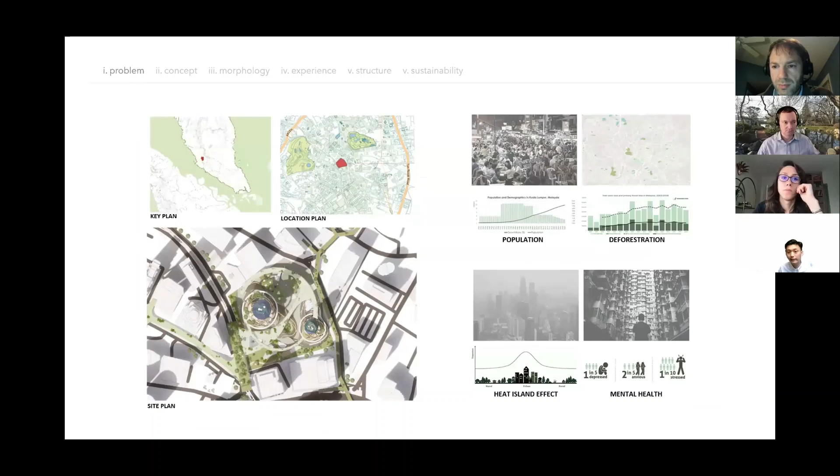According to our research, Kuala Lumpur is one of the top 4 most stressful cities in Southeast Asia. It is because of lacking spaces for relaxing and leisure activities in a natural setting. More and more city dwellers are suffering from mental health issues such as depression and isolation. Therefore, it is proven that humankind cannot survive without nature in the long term.

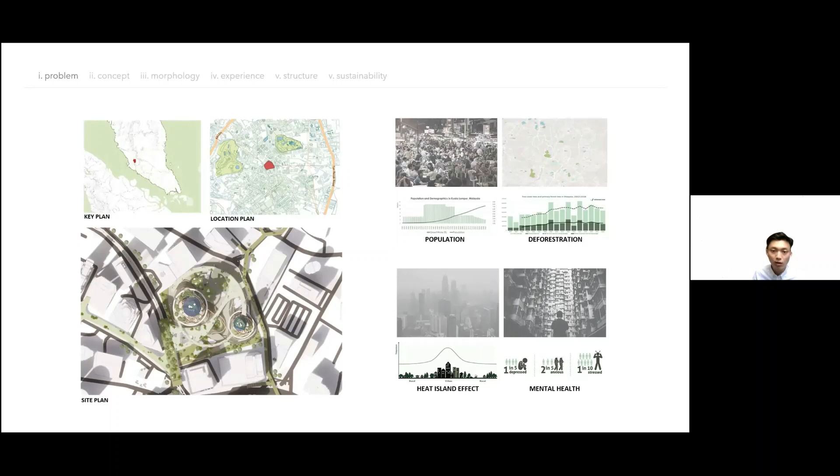Are modern city developments in line with the biological build-up of our bodies and minds? The concept of the Seed is intended to build a home for humankind, flora and fauna, to celebrate the nature which it originally belongs to.

The proposed tower is located at one of the city's most prime zones, surrounded by administration and office towers in the heart of the city center. The farming and ecological park intersects between the towers to form a continuous vertical forest. It will serve as a green catalyst to attract local urban residents and tourists, leading to substantial improvement in the living quality of the place.

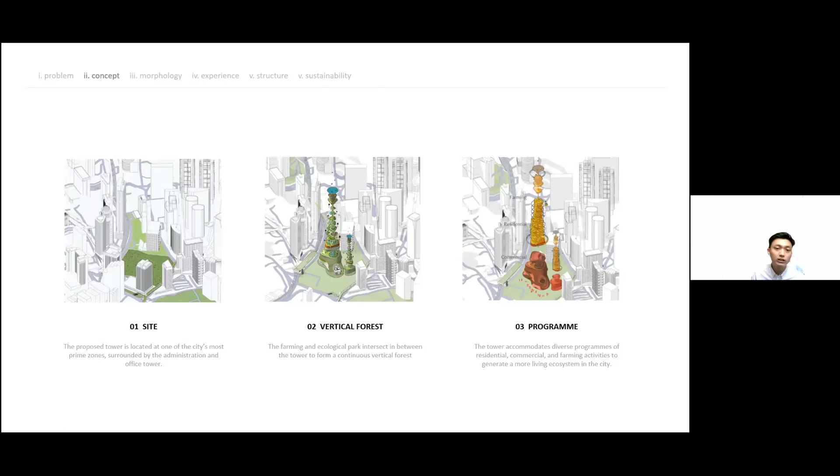The tower accommodates a diverse program of residential, commercial, and farming activities to generate a more economical, sustainable, and living ecosystem in the city. The Seed can plug into different cities around the world with adjustable size, scale, and proportions to respond to the site context respectively.

Below the tower, the urban linkage is proposed to enhance biodiversity and is activated by a walkable walkway connecting people in different directions. Lastly, the modular living pods allow users to work, stay, and experience the Seed, as well as have a short break and get out of the hustle and bustle of the city.

The containers are flexible and adaptable, which can be plugged in or out according to people's needs.

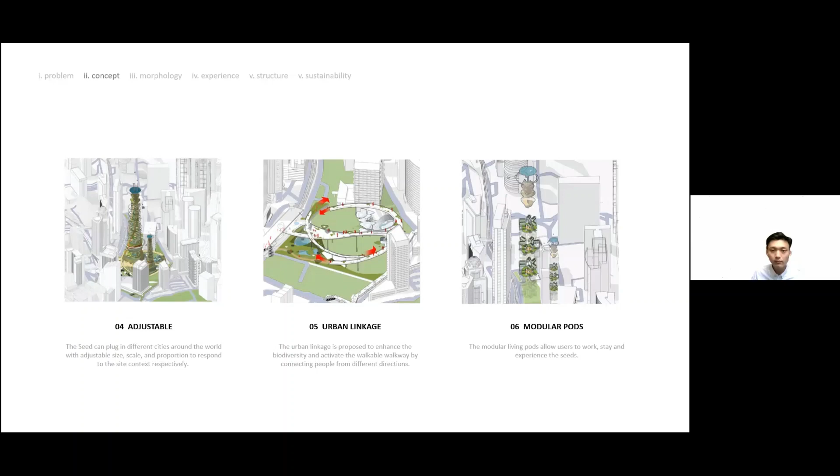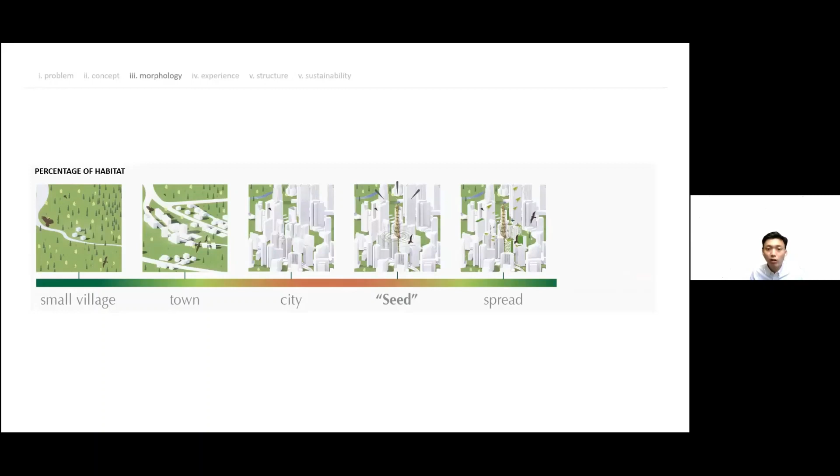Before civilization, humankind coexisted with nature fine. Right now, our selfishness is fragmenting the forest because of rapid development. Gradually, the imbalance of abiotic factors is the key to the global warming effect.

As the Seeds turn green, they help enhance biodiversity for a balanced and harmonious coexistence between humankind and nature. The Seeds accommodate diverse programs of residential, commercial, and farming activities to form vertical cities.

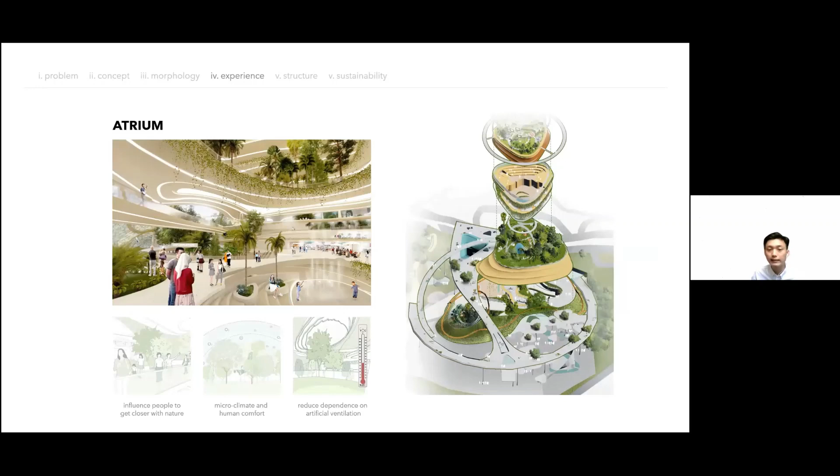At the atrium, a mall with a tropical rainforest garden is designed to invite people to get closer with nature and create a microclimate inside the tower to reduce dependence on artificial ventilation.

Above the atrium, there is a rainforest recreational sky park. This sky park is created to provide urban wildlife a place to settle down, and a space for urban people to rest and relax.

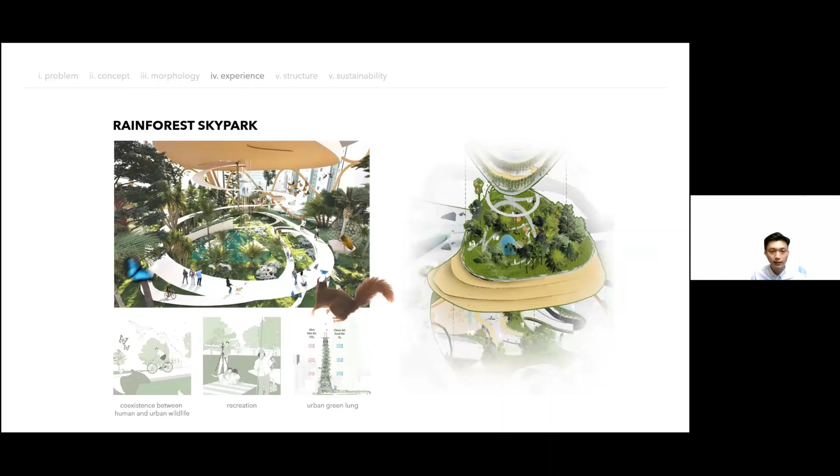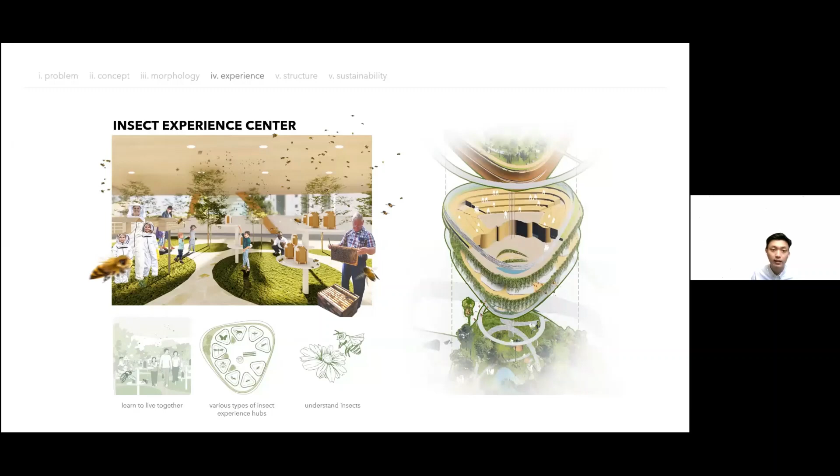The Insect Experience Center is designed to increase people's understanding of the benefits of insects such as bees and butterflies. The target is to influence people to appreciate, love, and learn to live together with insects. A Research and Development Center is set up to research the use of insects and how it can improve our ecosystem, economy, and waste management through pollination in urban areas.

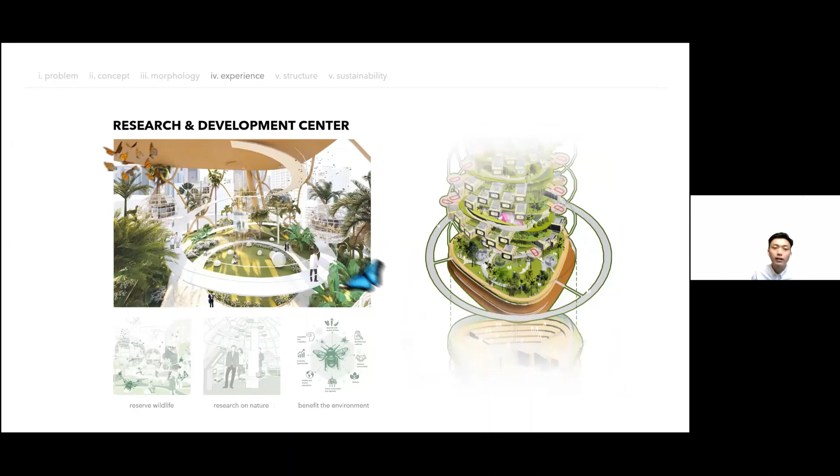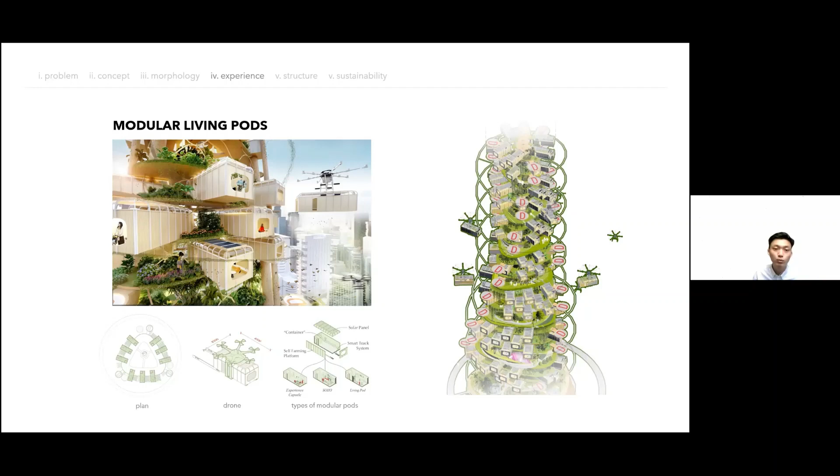The Seeds consist of 3 modular containers - experience capsules, SOHO, and living pods - for different user experiences. Each module is self-sustainable, with solar panels and its own farming pockets to empower consumers to take charge of their daily usage.

In today's construction, technologies have shown that twisting towers are beyond aesthetic purpose. This type of design can make a building more aerodynamic and energy efficient, and these features have apparently reduced structural construction materials.

The seed is designed in a twisted tree-like structure, which is inherently efficient as the form tapers in response to increased wind loads. The wrapping vein-like, glue laminated timber structures extend to the top, forming a porous facade that acts as a filter for urban pollutants in the city.

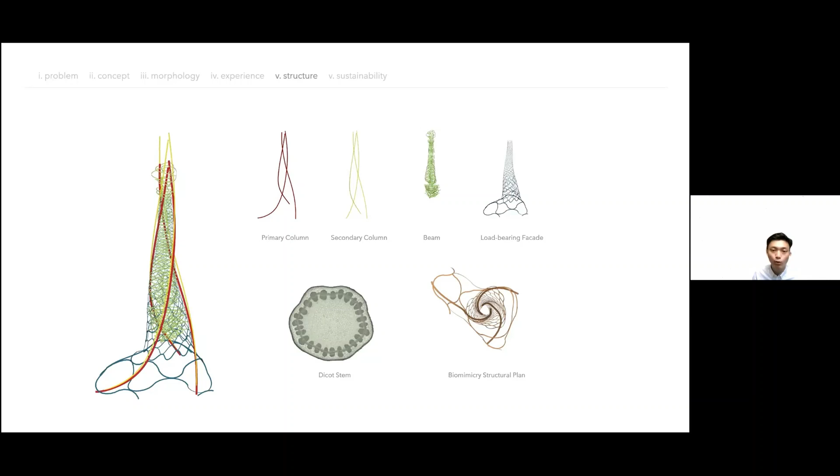The towers serve as a green lung, wrapped by hanging plants to help refresh air particles from the urban area. The tower collects rainwater from the top for farming purposes, supported by a mist system to sprinkle seeds for agriculture and eco-farming around the tower.

The towers receive sunlight on modular containers, offsetting the energy consumed for light and sound. The waste is valued in biodegradable waste systems for energy generation, as a renewable form of energy to supply back to the buildings.

Overall, the farming, green belt, and landscaping around the tower allow insects to move in different ways, enhancing biodiversity connections and the defragmentation of greens. All these solutions overcome the still essentially anthropocentric and technical concept of sustainability, while moving in the direction of new biological diversity for future generations.

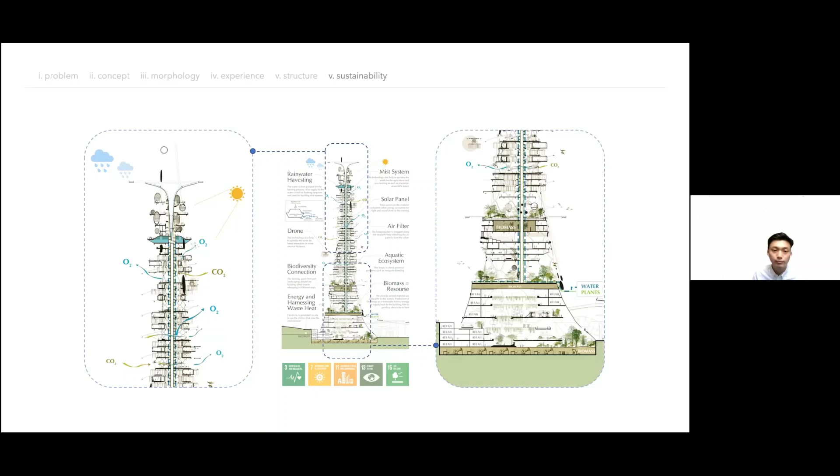Overall, the building with natural settings engages human feelings and visual connectivity, as well as emotional impact, achieving a high degree of harmony between human and nature, bringing mentally suffering urbanites a psychological relaxation.

Green a city starts from planting a good seed. The seed is a prototype building designed for promoting biodiversity, which not only caters to humans' needs but also emphasizes the relationship between humans and other living species on earth, enhancing biodiversity and creating a green, happy, and healthy living environment in cities for humans, flora, and fauna around the world.

Let us look forward to creating a whole new world in the future. Thank you.

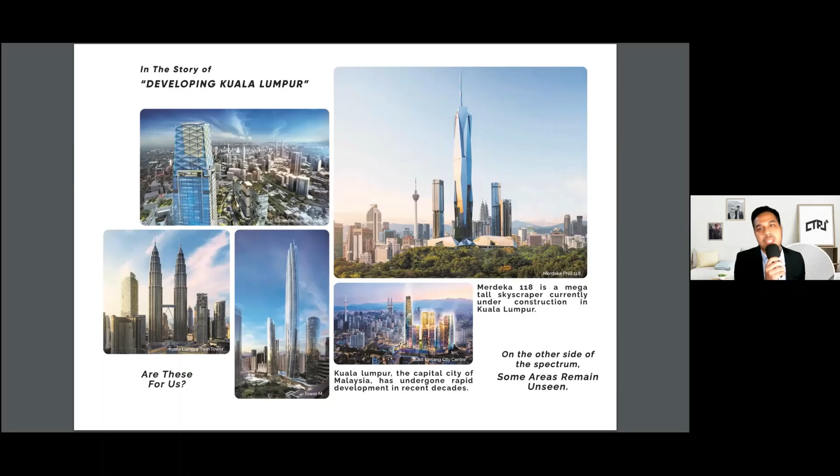One of the unseen sides of Kuala Lumpur is Pudu. It was once an economic gem of Kuala Lumpur, known for its market goods such as vegetables and chickens. However, currently Pudu is seen as the dark spot of Kuala Lumpur; rapid development of surrounding areas left Pudu with several critical issues that shouldn't be happening in a well-developed country. Due to this underdevelopment, it leads to issues of poor waste management, a migrant-dominated economy, and a dirty market. So from a market haven, Pudu has turned into an unfriendly and unhealthy market.

So, unresolved issues in Pudu. The presence of a large wet market in Pudu leads to the first critical issue: improper waste management. This leads to a dirty and unhealthy marketplace that makes local customers uncomfortable exploring it.

More than 100 bins of bio-waste are generated daily by 1,800 market stalls in Pudu. The question is, the waste is produced every day, but where does it go? The community within Pudu is to be blamed, as the waste is not properly managed. However, a solution can be devised to benefit the community and address the rising rate of unemployed youth.

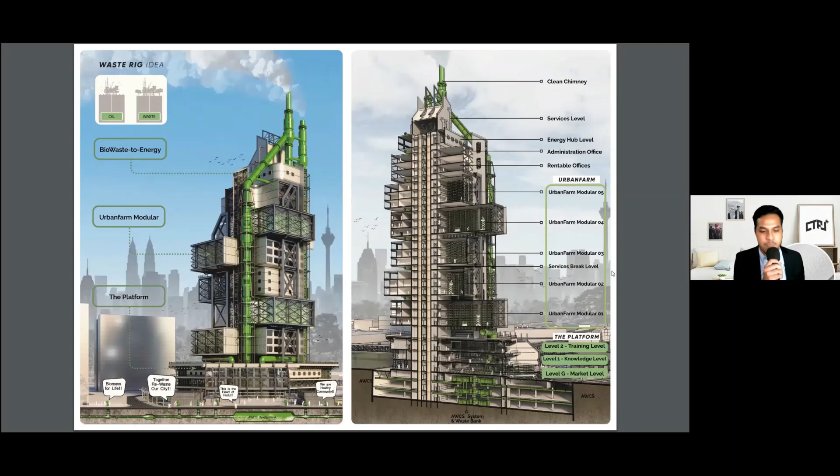So the big pipe is the Eternal Engine, the main component of the building. It's a mechanical system that can collect waste from the building itself and from the entire neighborhood to generate waste into energy and fertilizer.

As we can see in the diagram, the horizontal biomass process shows the sequences of a conventional biomass system, while the right diagram shows the innovation of these sequences into a vertical manner. The waste collection system is divided into several methods: from the building itself, from the neighborhood, and from the nearest market.

Additionally, these features use pneumatic conveyor technology, using pressure to transport waste, which can reduce environmental impact.

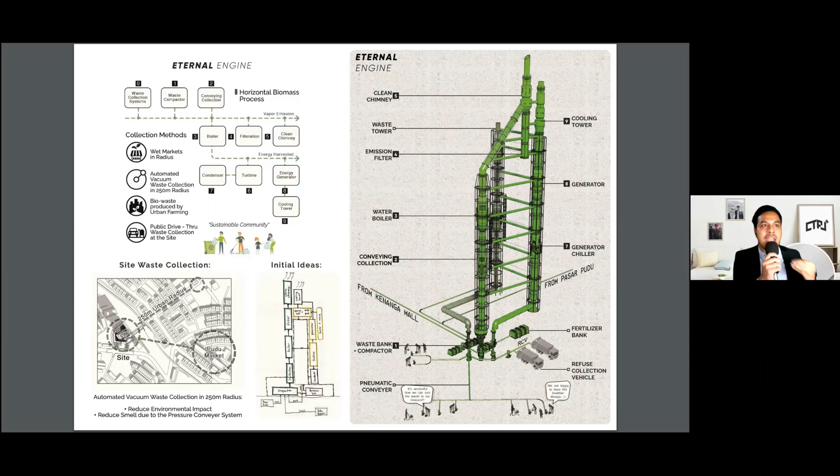The second component of the building is the urban farm modular, a triple volume stacked farm connected to a sandwich of office, R&D spaces, and operation spaces. This modular is integrated together with the Eternal Engine system to achieve zero waste farming.

These sketches illustrate my initial ideas, highlighting the integration of spaces at different levels to form the urban farm modules.

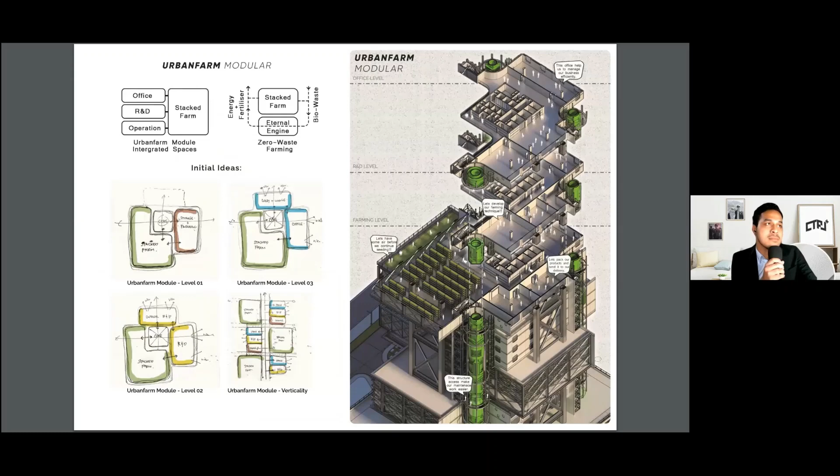So why high-rise? With the Eternal Engine system, instead of having farms in different locations, we can have a group of farms stacked together, which reduces land usage, reduces environmental impact, enables efficient operation, and allows close proximity for maintenance.

This is the perspective from the urban market, located at the podium. I want to highlight the Eternal Engine penetrating the urban market, symbolizing the capability of the biomass system to circulate the economy in Pudu.

The second highlight is the direct chuted stall, where the hawker can directly toss their waste from their product into the waste bank.

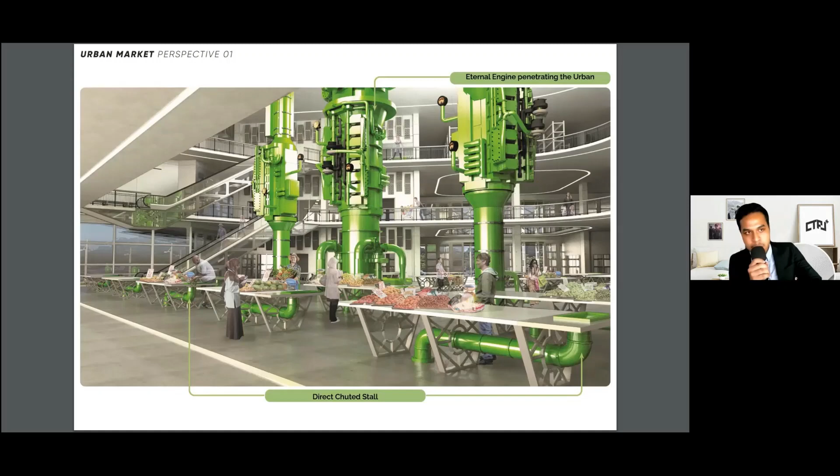So the second perspective of the urban market highlights the usage of coal material as paneling to absorb odor and freshen the air of the market. We can see the goods are fresh because they come from the urban farming itself.

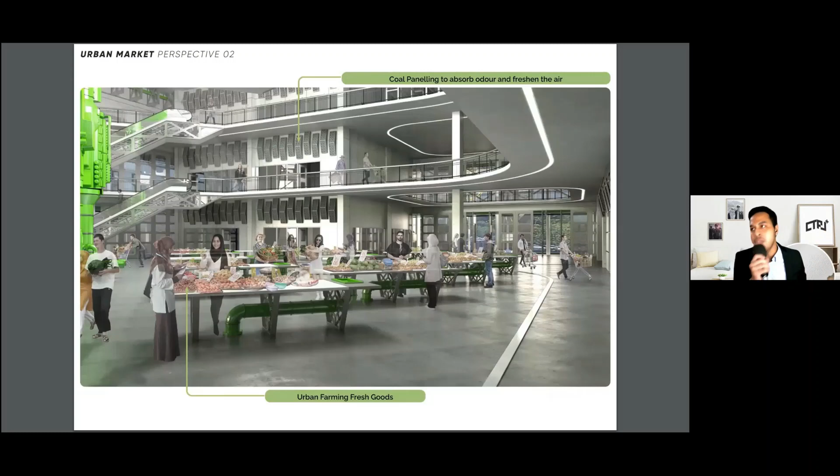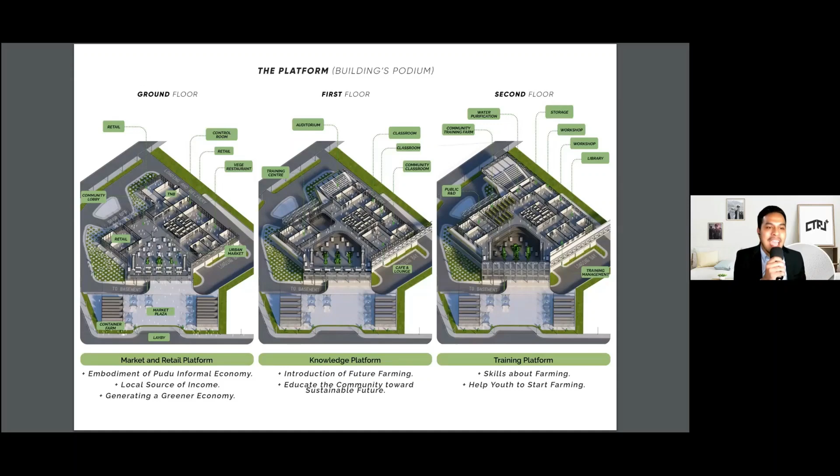So the last component of the design is the platform, which is the building's podium. It consists of a market and retail platform, embodiment of Pudu's informal economy and generating a green economy. The second is the knowledge platform to educate the community toward a sustainable future. And the last is the training platform to help youth start farming.

Finally, Pudu is pioneering other buildings toward zero waste living with several value innovations such as effective refuse, energy generator, sustainable design solutions, farming as a potential economy, recycling urban waste, and others.

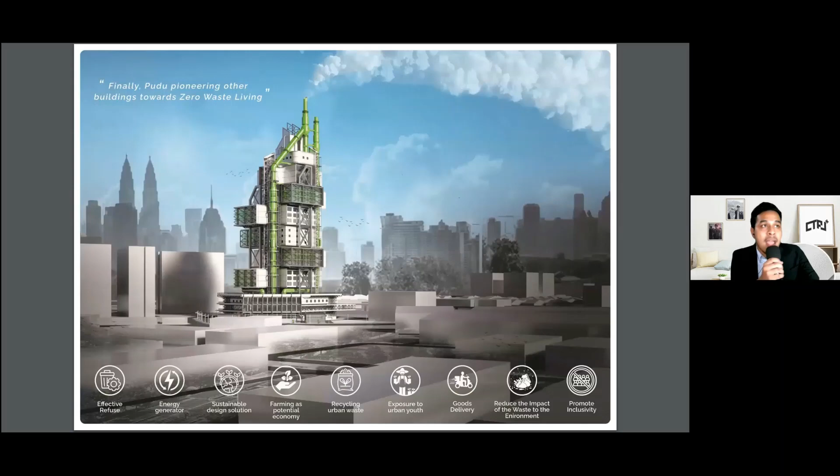And I want to end my slide with a narrative: the amount of avoidable food waste generated by Malaysians in 18 days is equivalent to our Petronas Twin Towers filled to the brim.

But with the idea of waste rig, we can recycle and convert the waste to energy. If we can maximize the idea, we can reduce waste to the lowest level, and finally Kuala Lumpur can achieve zero waste living.

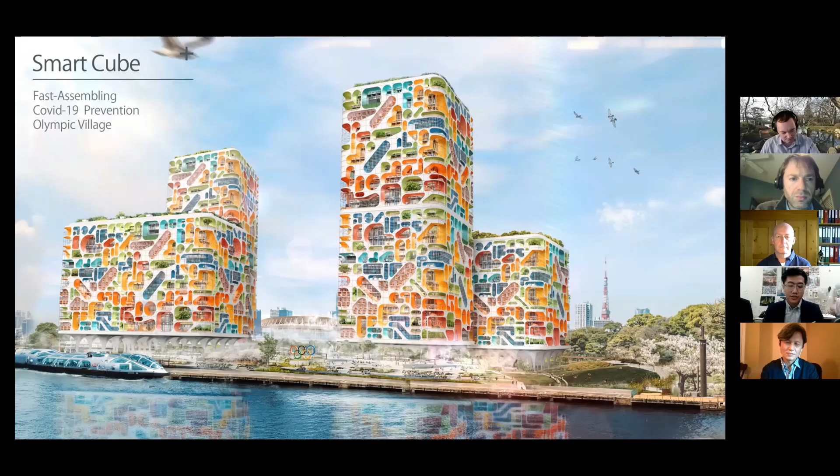Our life has changed a lot because of COVID-19. It is getting worse and worse, with the number of infected people reaching 200 million, making a lot of difference in our life. So we considered the relationship between architecture and a life model 3D design. At the time the project was in the creative stage, there was also a sporting event held every 4 years affected by the impact of coronavirus.

The first stage is preparing for the competition. This stage has the risk of taking local virus out of the country. The second stage is flying to Japan, which can cause infection problems on the airplane.

The third stage is arriving in Japan to gather for training or competition—there's also a risk of infection between players at this stage. Stage 4: athletes are weaker after training and more susceptible to the virus. These processes carry a high risk of infection, so keeping the Olympics safe—particularly the high risk of infection in stage 3 from training or competition—gave us the motivation to do this project.

In order to achieve our concept, we added 2 elements to our architecture: technology and fast assembling. First, technology—we use 4 technologies: AR, navigation, big data, and internet to make different changes in our life. Next, I will introduce the new life model in detail. First of all, reservation and planning are made using an exclusive app on the mobile phone, including meals, training, and so on.

In addition, training menu and diet management, which can be discussed with the coach, can be managed digitally. The app will use big data, analyzing every moving path and using time differences to avoid the possibility of crowd gathering.

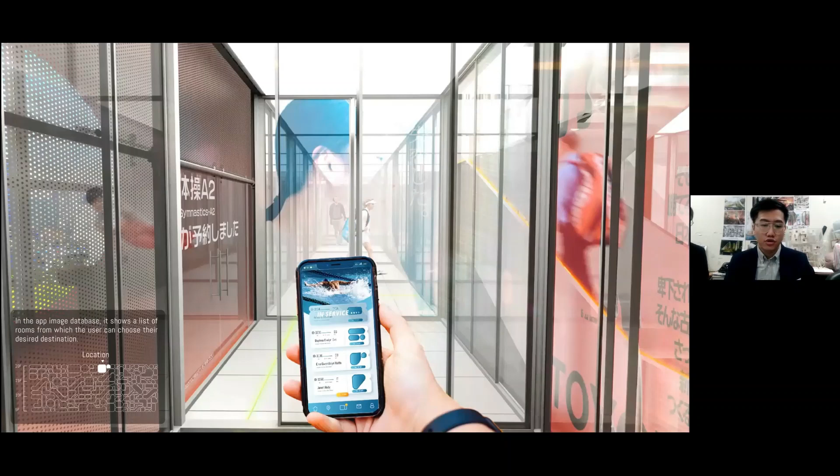This picture shows athletes using their mobile phone to go out to train. You can see from the picture that the phone shows the exclusive path to the destination space, and in the circulation area the display is also used to guide the athlete more easily and clearly.

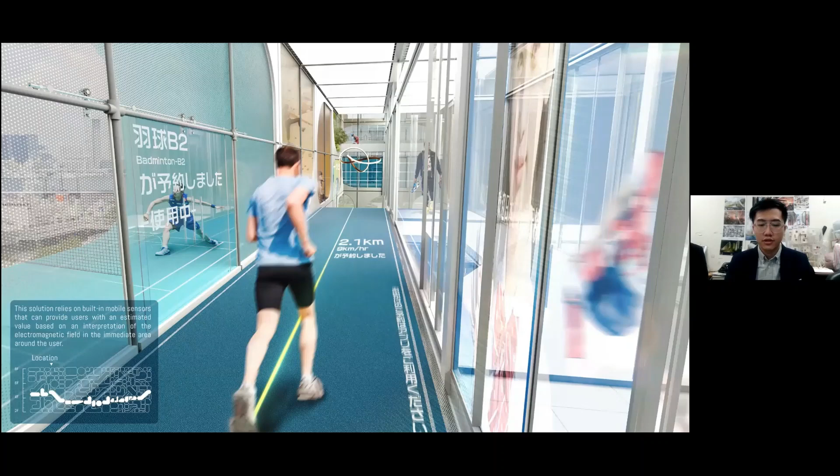In addition to single function individual training space, there is also a semi-public training track. Projection will be used to give athletes a clear diagram of runway paths and to display some training data together. It can make training more efficient and allow players to know more about their training status.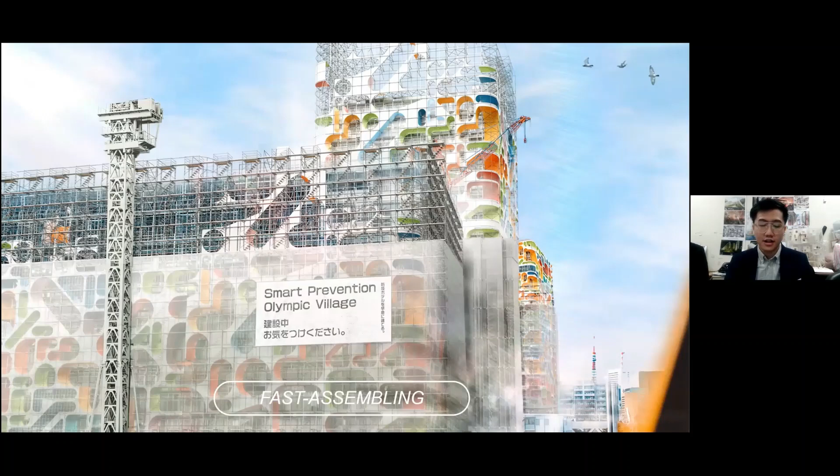The following diagram shows the flow chart of the fast assembling for this program. The first step is to fabricate various modules. Step 2, transport the complete module to the site. Step 3, get to the site and deliver it to the crew. Step 4, unpack and categorize various modules.

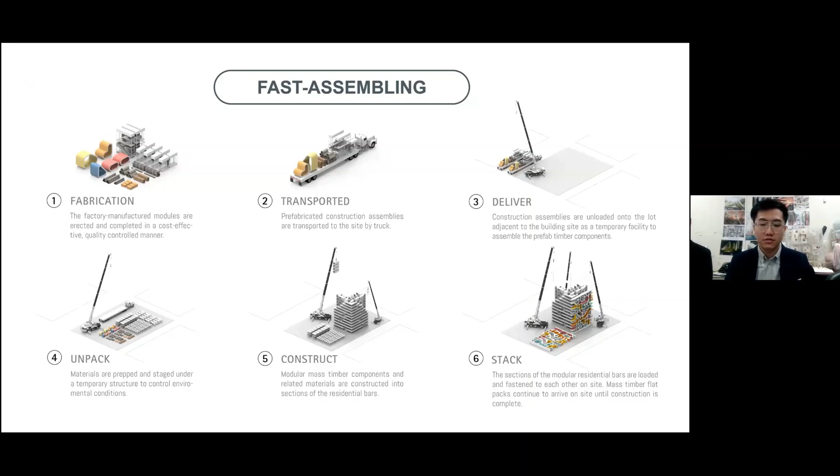Detailed design: there are 3 spaces connected from the inside to outside. The inner layer acts as the living units. All use a single-person suite, which can effectively achieve the effect of epidemic prevention.

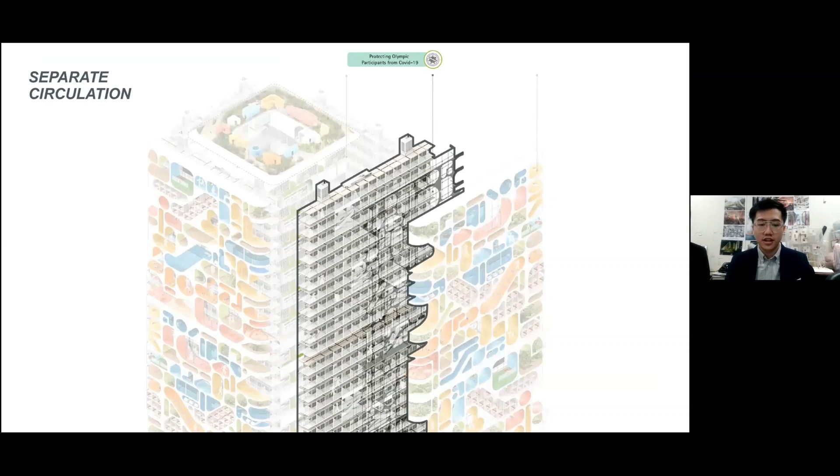The median layer is the epidemic prevention circulation space, which designs all the traffic flow, including stairs, elevators, and so on, in a modular manner. By combining technology with automatic doors, controlling their opening and closing results in a single exclusive traffic flow.

The outer layer is the training and activity space, including the training room, basketball court, swimming pool, and other different training categories of modules. It also includes an air park so that occupants can try to relax at the enclosed hotel.

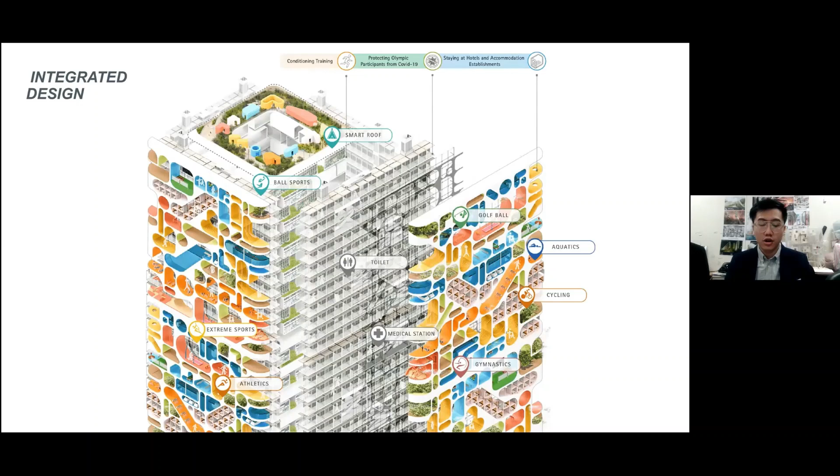Then how can players get to everywhere in the building? First of all, players will use their phone to make appointments and arrangements, starting from the resident unit, then pass through the median layer, the epidemic prevention circulation space.

This layer uses big data analyzing and AR to guide the path to achieve the effect of epidemic prevention. Finally, the third layer of training and activity space—players need to arrive at their scheduled space within a specific time.

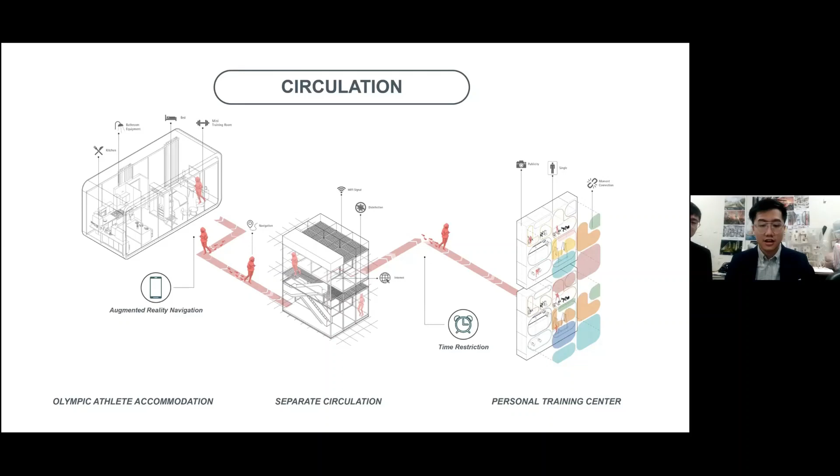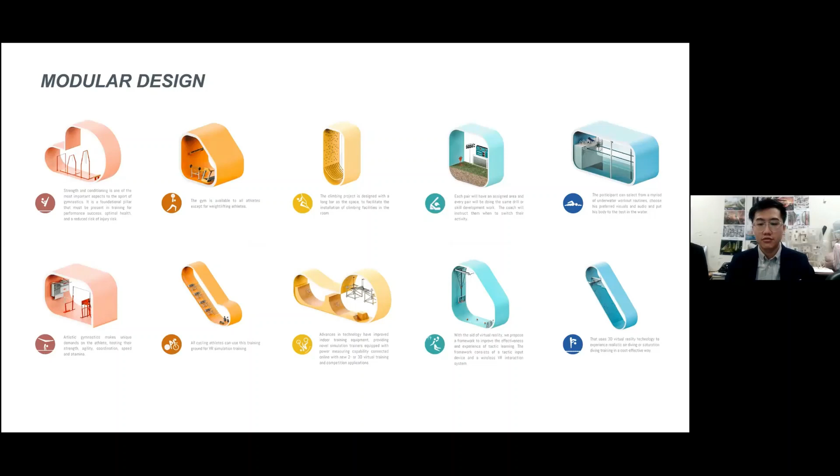Function module: we design training modules for swimming, basketball, training, rock climbing, horizontal bar, and more. We use balance, proportion, rhythm, and so on, mentioned in the principle of design, and consider the formation of the elevation of the building by the division of circulation and sport categories.

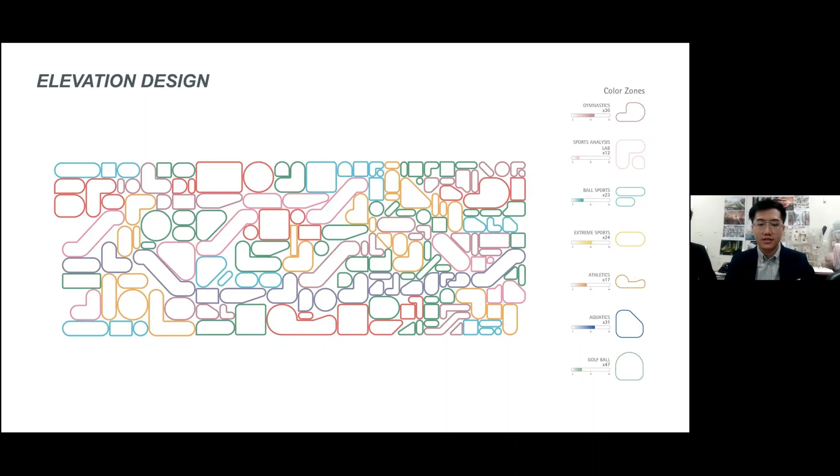We want to design an Olympic athlete village in response to the post-epidemic era of sport events, and we hope to propose an innovative way to solve the difficulty or crisis common to the world. Thank you for listening.

And thank you for presenting. Definitely tackling a lot of very immediate and prescient issues here with all of these projects. It's nice to see, if a little daunting, looking at all the problems that we are facing.

Jurors, questions? I have a question. Thank you, it was a good presentation. I believe you have a good approach to user experience in terms of technology and architecture, and I like the idea that you have used the modular construction approach. But my main question for your project was: what happens after the Olympics? Do you have an idea? Because we have the Olympics every 4 years, and always in a different country. Do you have an approach?

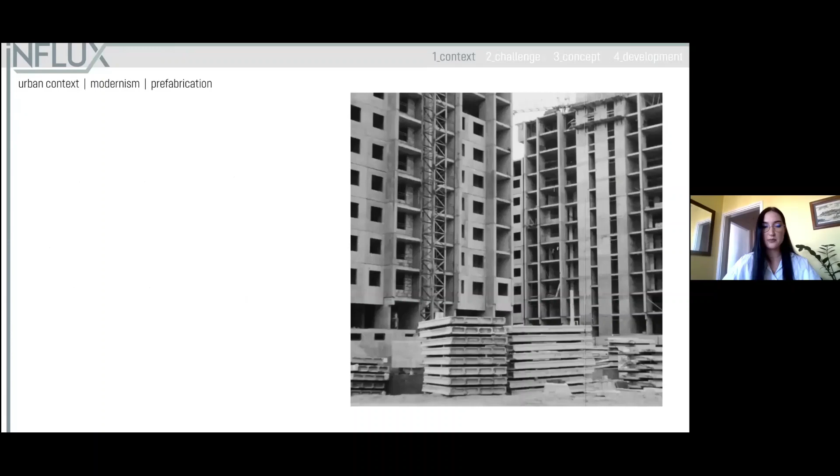The design is located in Belgrade, Serbia's capital, in the municipality of New Belgrade, in Block 17, near the Danube-Sava confluence. New Belgrade represents an authentic urban and architectural whole, designed and constructed using modernist concepts and strategies. It was once one of the largest construction sites in the world, and the largest construction area in the former Yugoslavia in terms of size, space, and number of apartments, buildings, and apartment blocks.

Initially, pavilions were built with the enthusiasm of young people at work actions, but that type of construction stopped very quickly. In the 1960s and 1970s, Yugoslav experts caught up with the most prestigious planetary builders and created a new part of the city according to the highest urban and architectural standards. This experimental settlement was constructed using innovative technology, a prefabricated structural system with installation of pre-stressed concrete elements, called IMS.

The Influx design focuses on the brain drain phenomenon: substantial migration of able-bodied, highly educated, talented, and creative young individuals searching for better pay or jobs under better conditions, causing Serbia to lose qualified people. During the crisis of the 1990s, Serbia lost a significant part of its best potential workforce. 5% of the total population emigrated, of which 91% were people less than 40 years old.

Even after 2000, the situation with migration did not improve, and every 8th highly skilled individual leaves Serbia. The adverse effect of human capital flight caused concern about the nation's development, and emergent situations such as the global pandemic of COVID-19 spotlight the lack of qualified human resources, giving it a new perspective.

Our design proposal, Influx High Rise, is a co-living space for young professionals, and part of a program to curb the outflow by encouraging skilled technicians and scientists to remain in Serbia, or motivate young educated people trained abroad to return or become transnational in terms of brain circulation.

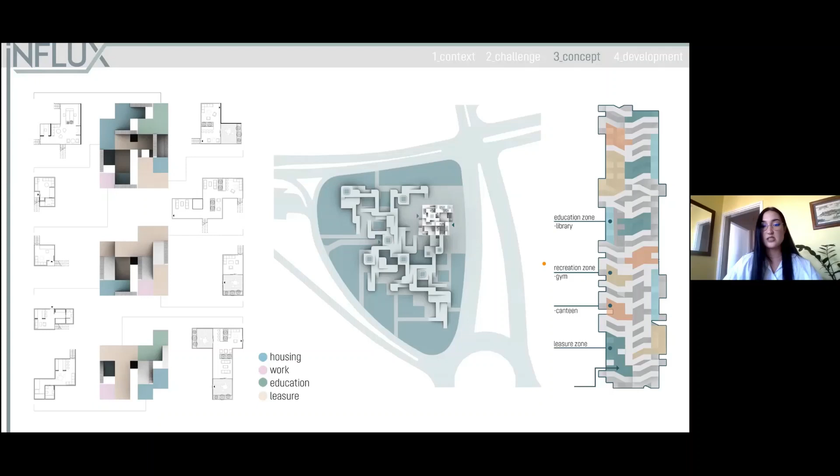The goal was to make better design decisions when creating new sharing spaces by acknowledging people's preferences and concerns before designing the project. Consequently, the design intention was to achieve the comfort of individual housing inside a tall building. Regarding urban design, the aim was to distribute the same concept that exists within the building itself through the outside space. This flexible spatial organization and distribution of contents balances the needs of users for individual, shared, and common spaces, while spontaneously encouraging connectivity, socialization, and the creation of community relations.

Our goal was to research the design possibilities of using increased computer capacities to raise the initial modernist understanding of architecture, as a set of prefabricated discrete elements or modules, to a new level of previously unattainable detail, materiality, structure, and aesthetics.

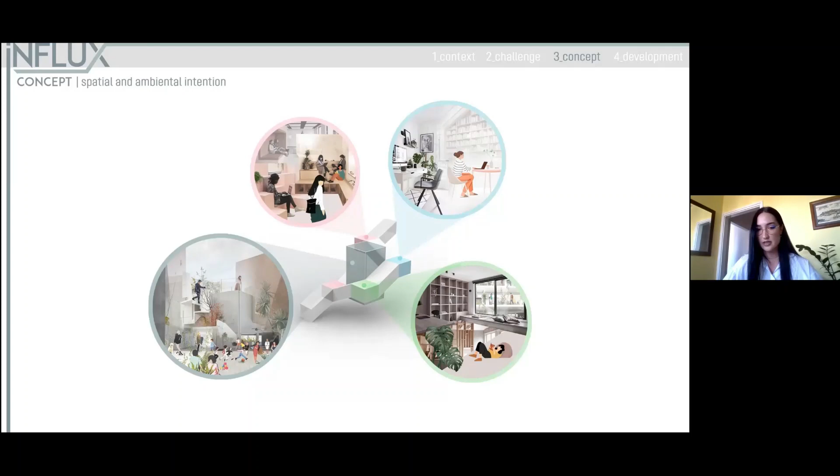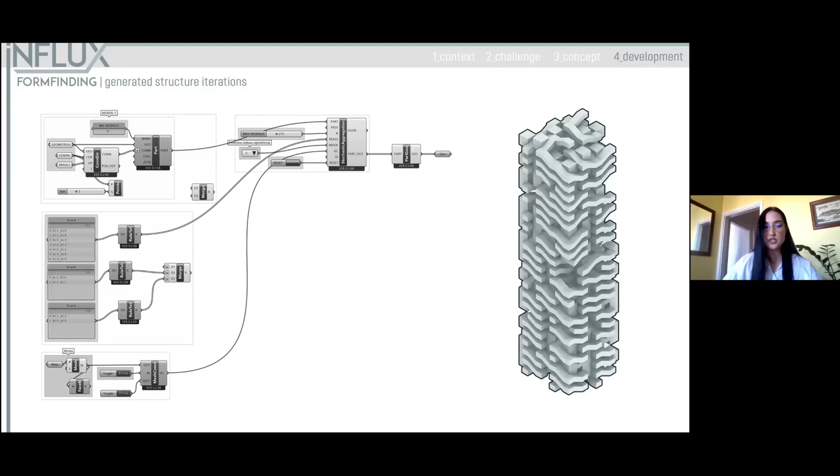Previous ideas were developed through a repetitive modular design approach in formal, structural, and technological terms. A generative design strategy based on computational open-ended generative systems was applied for the creation of spatial structures. Design exploration was done using a graph grammar compositional algorithm that generates buildings out of modules or building parts by applying defined composition rules, connections between modules, and constraints stochastically.

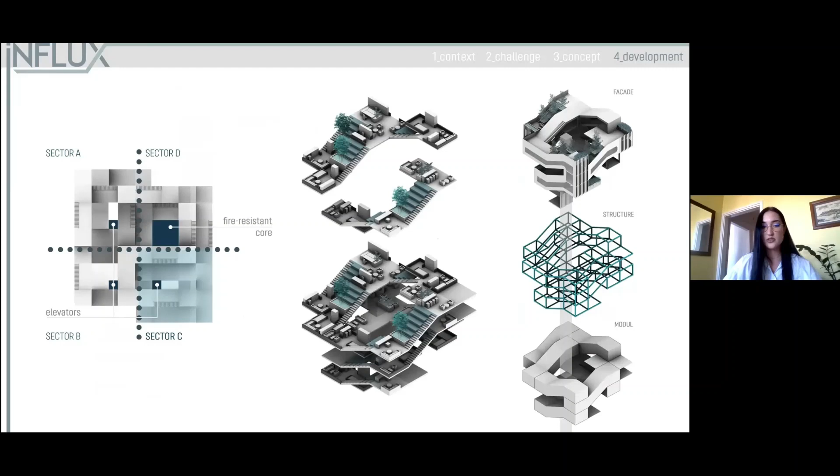The structure is manifested through two organizational categories: first, spatial contents in terms of living, work, education, and leisure; second, level of socialization in terms of individual, shared, and common spaces. The module, by its form and organization, represents continuous communication between these categories. The functional organization is illustrated by a group of modules, whose alternatives are repeated through the whole building.

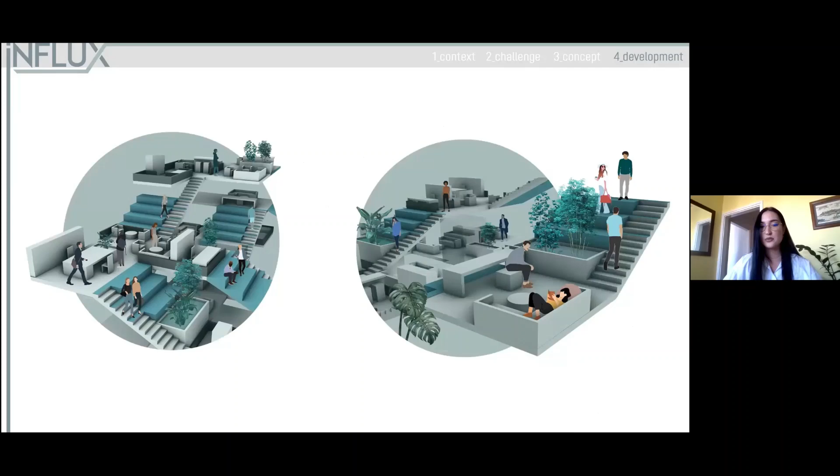The result is a dynamic spatial organization, complementary to the idea of creating communities that also share values, interests, and philosophy of life. Influx provides socially sustainable places that will motivate students to achieve greater academic and professional achievements, while providing much needed encouragement for talented individuals to reconsider staying in Serbia.

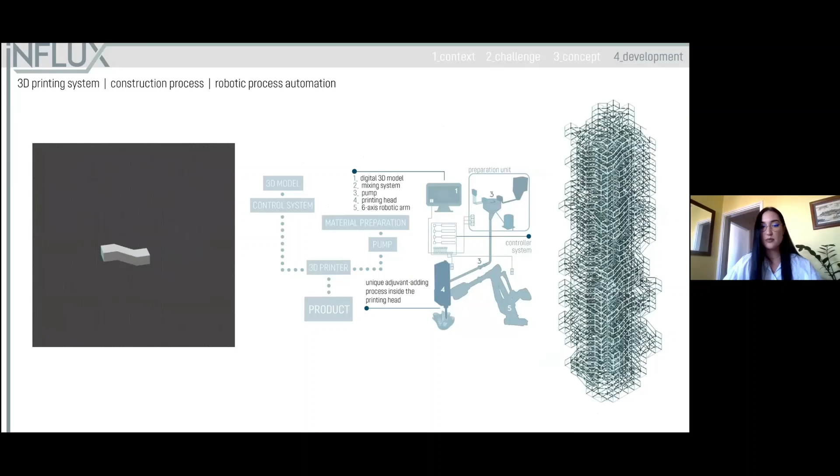The emergent structures, made of autonomous, modular, and repeated processes of composition, facilitate a self-assembly robotics fabrication strategy, increasing the efficiency and economy of the fabrication, transport, and construction time. The proposed application of automated design and construction technologies gives a hint at the potentials of digitally intelligent architecture.

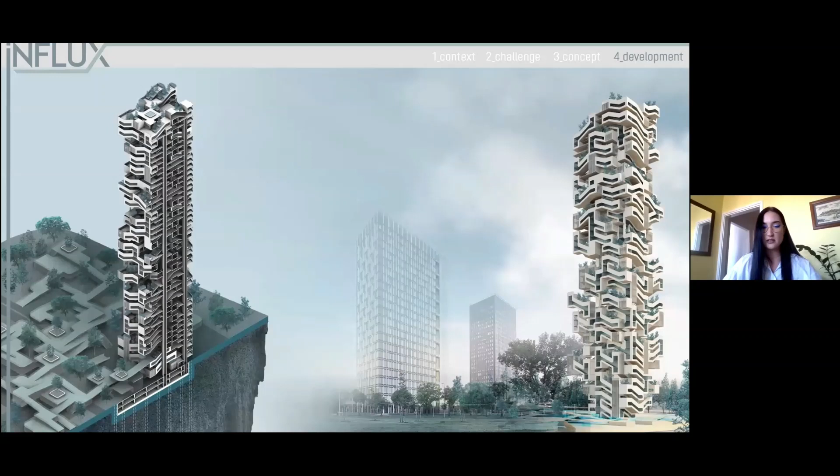The use of 3D printed concrete panels, in which limestone and calcined clay replace cement for materialization, is an homage to New Belgrade's concrete architecture, while also meeting current sustainability criteria. Focusing on the human user, social sustainability occurs when the formal and informal processes, systems, structures, and relationships actively support the capacity of current and future generations to create healthy and livable communities. Socially sustainable communities are equitable, diverse, connected, and democratic, and provide a good quality of life.

And thank you for your attention.